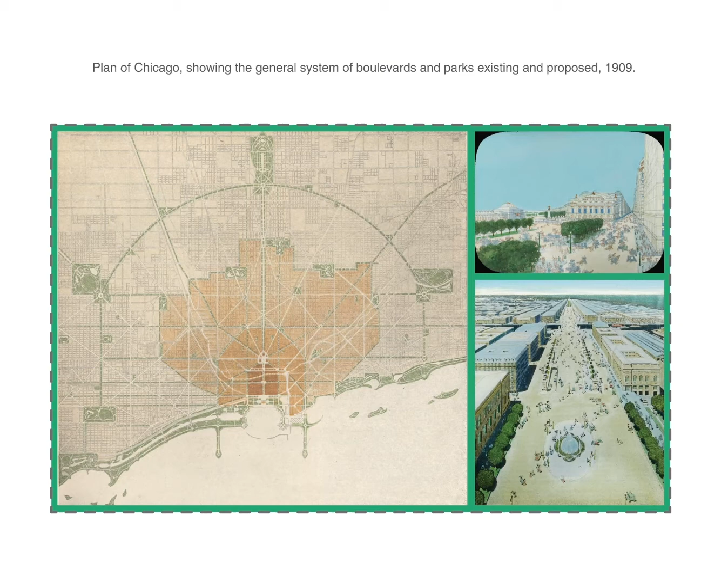These are some drawings from Burnham's planning that show the general system of boulevards and parks existing and proposed in Chicago, and this is the proposed civic center in Burnham's planning for Chicago.

Beside the Chicago Park Boulevard, there is a case study from Iran in the city of Isfahan. Shah Square is a successful urban project located in the central part of Isfahan. Structures of different purposes and architecture surround this square.

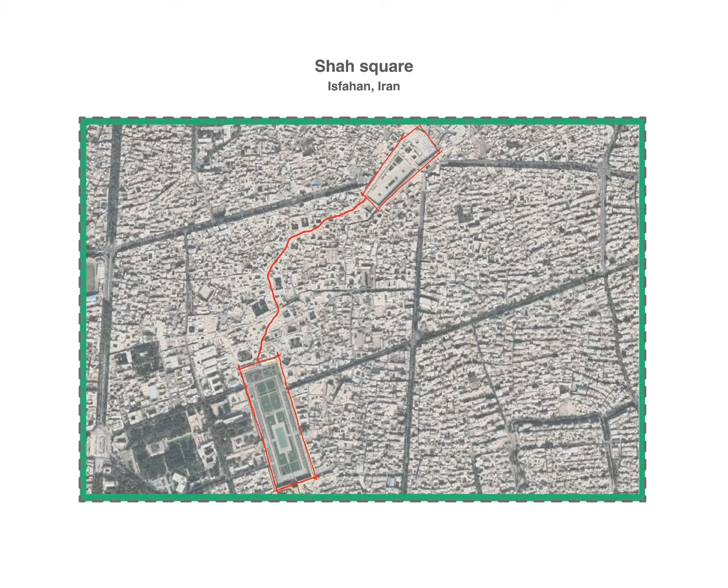Together with the main bazaar of Isfahan, they comprise a huge complex to explore. It's a magnificent and unique monument in the world which has a remarkable reputation among tourists. This complex has religious, political, economic, and recreational functions and is always a shining example of the beauty of Iranian and global art. Shah Square is part of an urban complex with two great squares joined by a bazaar.

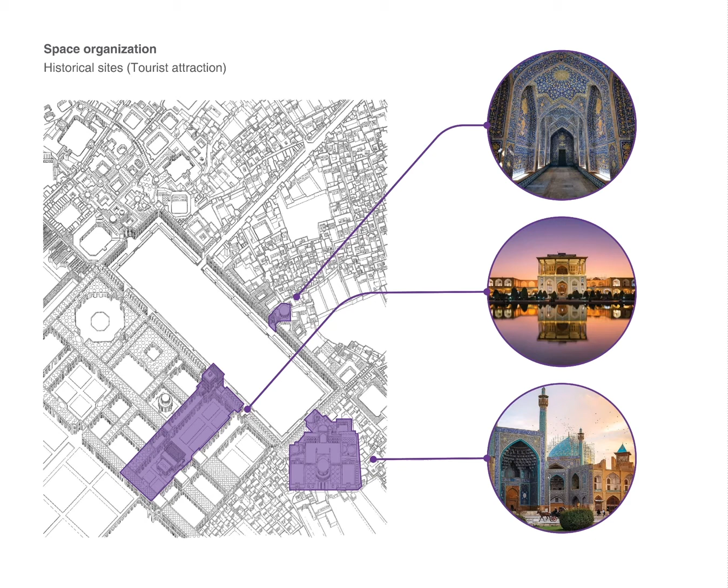Many gatherings are held in this square for various ceremonies and occasions. Three historic buildings are preserved and reprogrammed as a tourist attraction. The Great Imperial Complex in the square is reprogrammed as an Art and Architecture School.

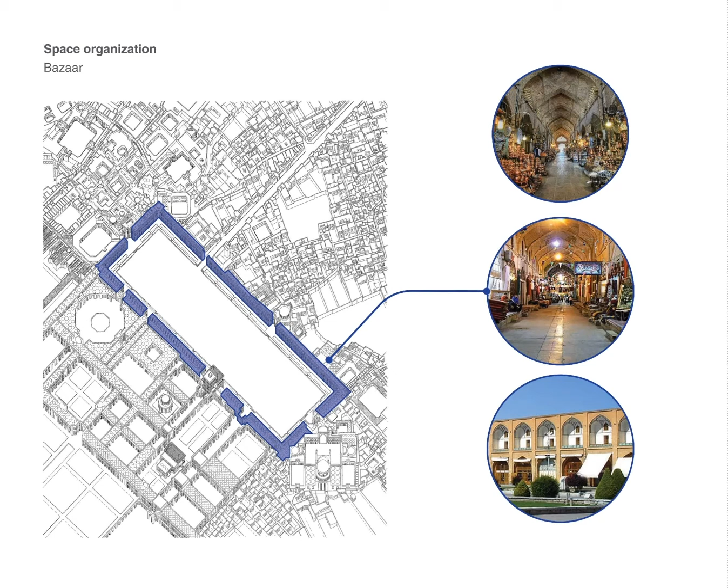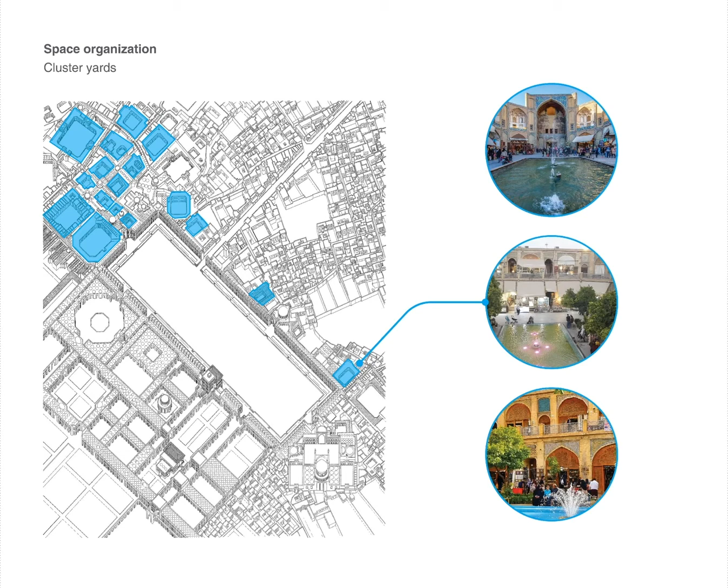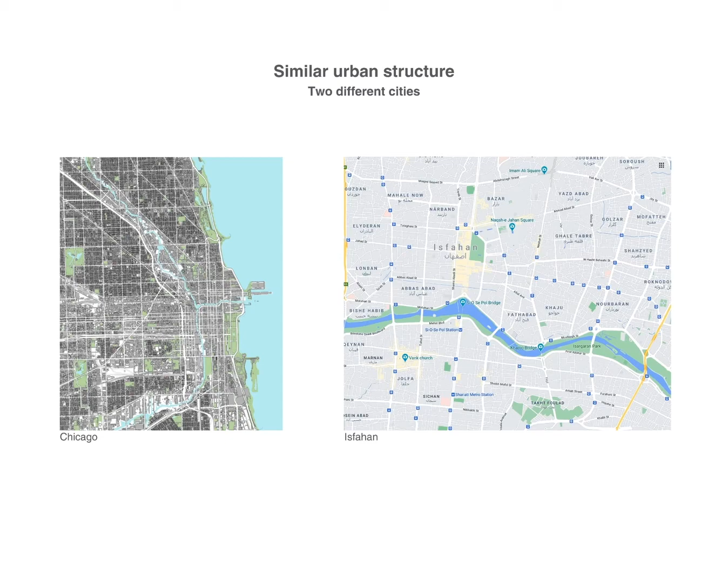The square is surrounded by a two-story row of shops and consists of a collection of buildings that meet the needs of the city, and cluster yards with similar space structure as the main square are supporting the project by hosting secondary functions. The city of Isfahan is like Chicago in terms of urban structure. Both urban structures are based on a grid and are considered densely populated cities. Rezkoville is one of the abandoned lands located in the surrounding of the Loop in downtown Chicago.

This site is bordered by Roosevelt Road, Clark Street, and the riverfront. It's now undeveloped, occupied by homeless people. This wide, overgrown lot is still home to an increasing number of people.

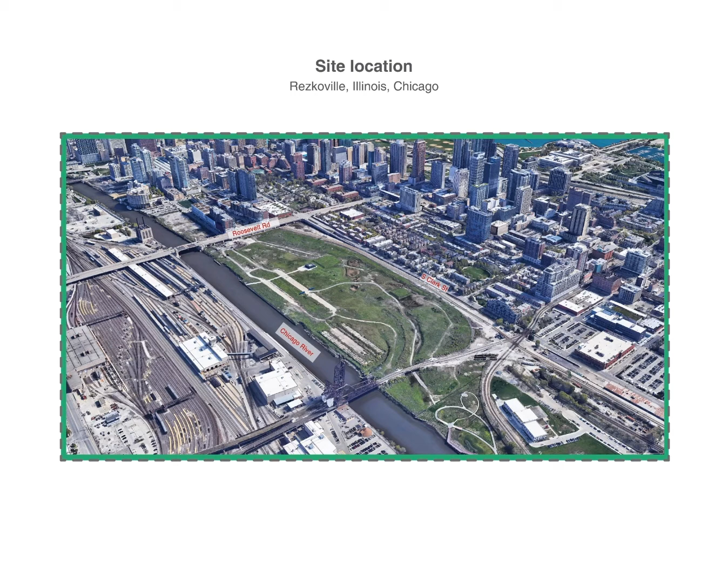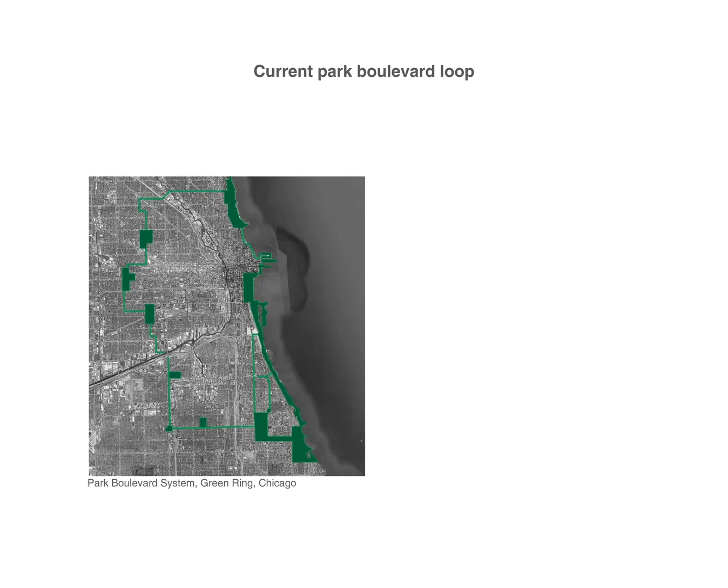There has been consideration to zoom in on this site to experiment with the possibility of creating a new member in Chicago's Park Boulevard. There is also a bike route in the center of Chicago which overlaps with Park Boulevard, providing an excellent opportunity for a pedestrian-friendly improvement in this area.

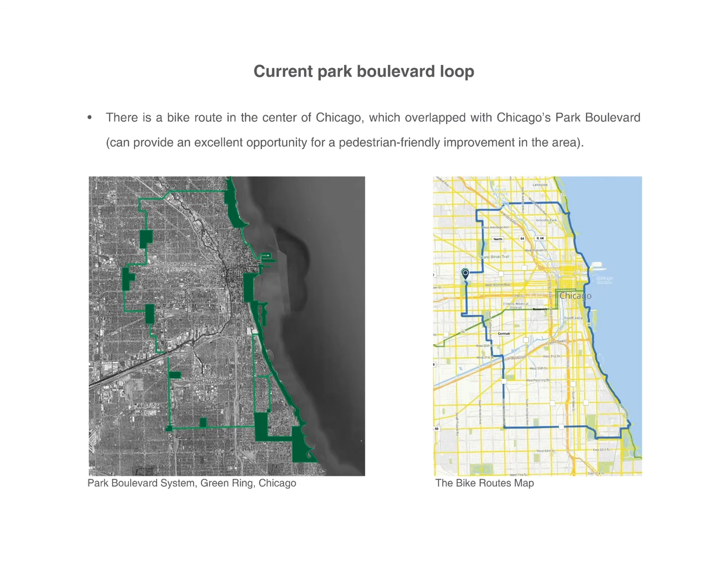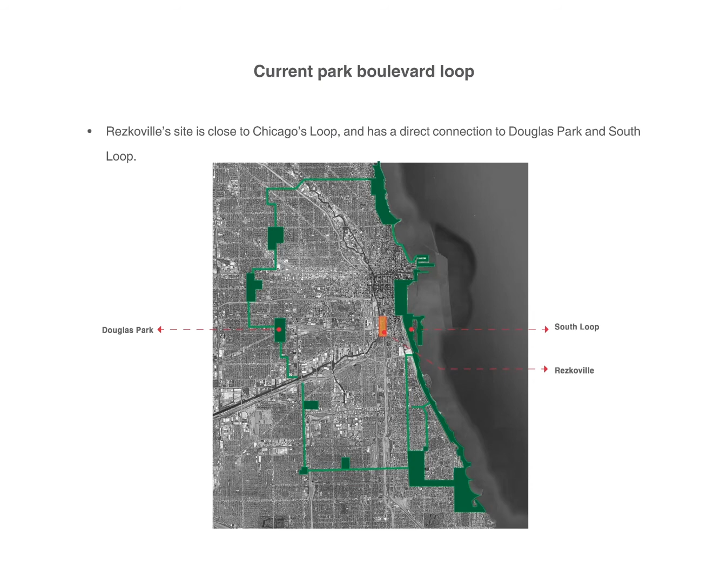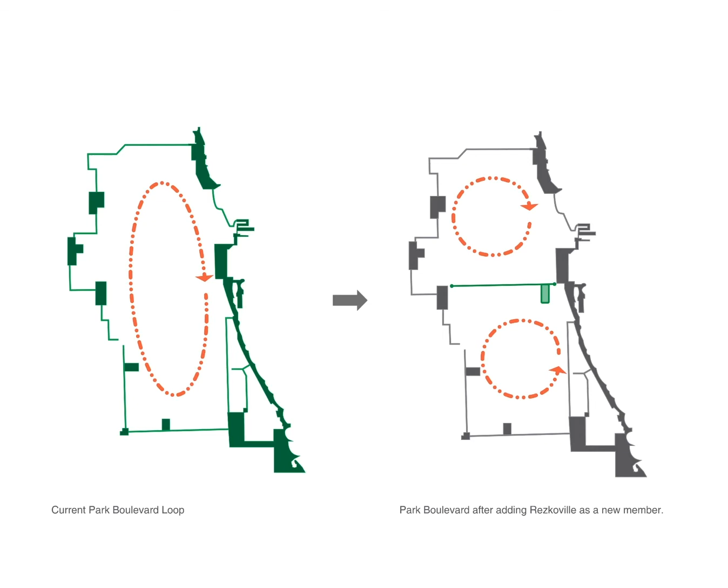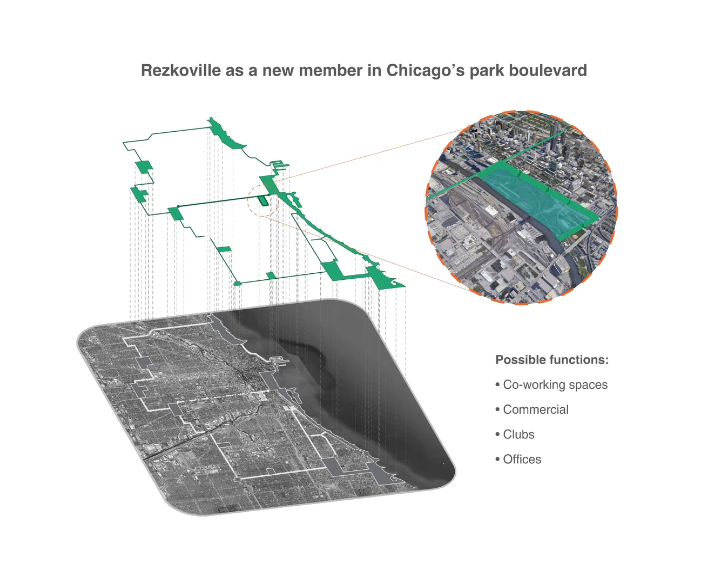This new member is aimed at creating a harmony of open and indoor spaces, which includes different functions such as co-working spaces, commercial functions, clubs, offices, startups, and classes. This project includes three major parts: the ring, the lobbies, and the square.

In the square, the green spaces and pavements are designed so that they can be divided into smaller parts. The green space of the square is on the same level as the pavements. There is nothing to distinguish them except their coverage with different materials.

The square at the center of the complex is designed to be very flexible, and it can be used for different purposes such as ceremonies, sport competitions, recreational leisure activities, local markets, and different exhibitions.

The ring is designed at two levels. On the ground floor, it mostly focuses on commercial spaces and places that are in unmediated connection with people. On the upper floor, there are mostly offices, clubs, and low-cost places for startups.

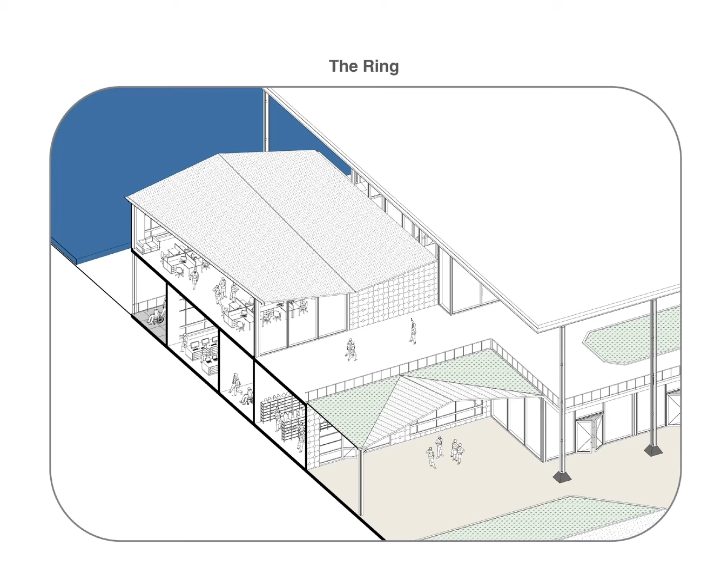Along this ring, the lobbies are designed as the main intermediary between the spaces of the project and the urban environment. Lobbies are elevated higher than the ring. They are double height and triple height, providing an open space without any extra parts. These lobbies play the role of a welcoming space and entrance gate.

Most of the walls are curtain walls so that they can provide a bright and fluid space. The placement of lobbies enhances the intelligibility and addressability of the complex, changing it into a combination of proper parts related to each other.

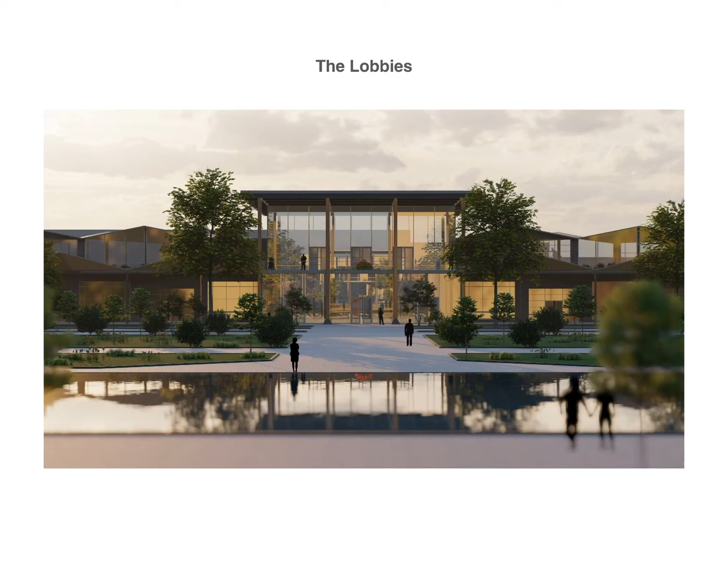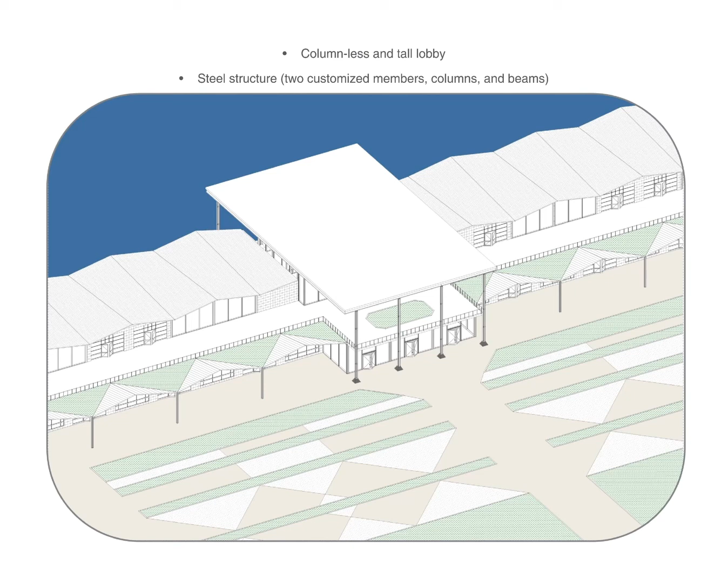In order to create columnless and tall lobbies, a steel structure with customized profiles was designed. This steel structure has two customized members: columns and beams. The structure elements are positioned to create open corners and non-interrupted elevated trusses.

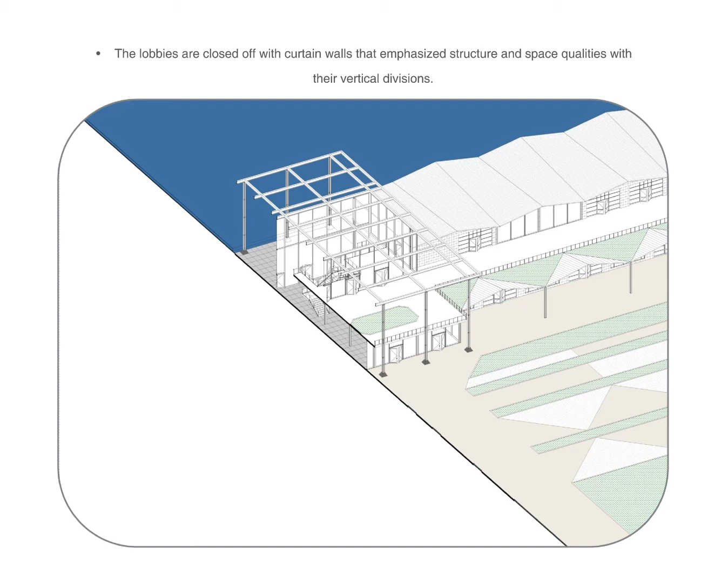The lobbies are closed off with curtain walls that emphasize the structure and space qualities with their vertical divisions. Each lobby on the second floor has one truss facing the square, connected to the truss line on the second floor, offering direct access to the second floor spaces.

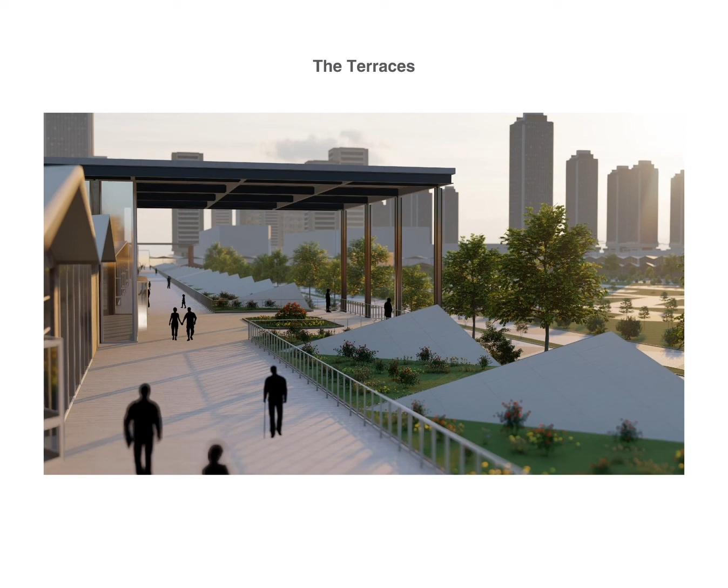On the ground floor, accessibility is provided by the porch line, which is in accordance with the climate condition of Chicago. Since the winters of Chicago are cold and the summers are hot, it's very important to control the climate condition in the design.

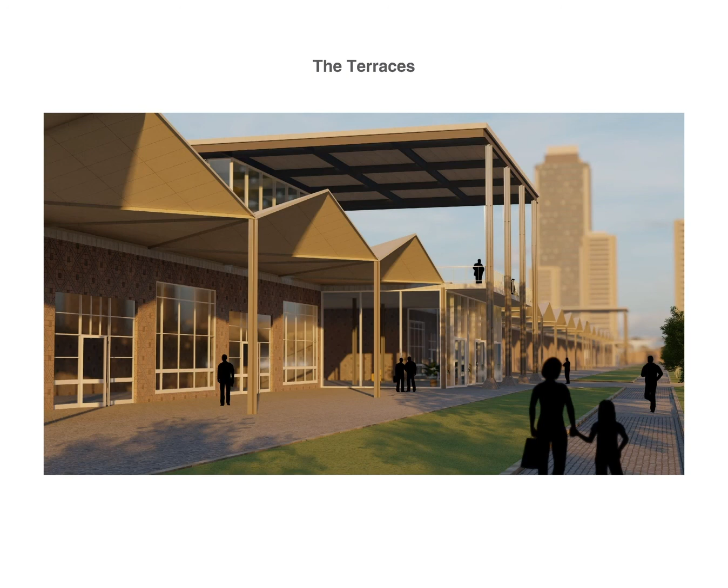Regarding the climate conditions, the porch casts a shadow while also being a rain shelter. This site has an additional porch that provides a direct connection with the water for the ground floor facing the adjacent river. However, the edge of the river is accessible only by the lobbies adjacent to the water; other spaces are not directly connected to the water.